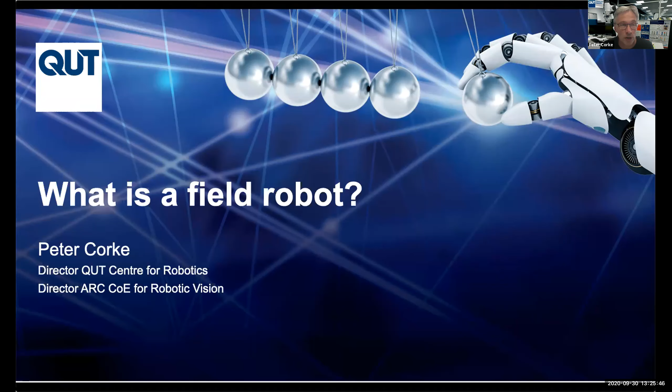So I'm going to talk very quickly about what robots are. Many people have got a notion of what robots are, but often that comes from Hollywood and fiction rather than from reality. The reality of robots today is that most of them are machines that work in factories.

The only impression to take away here is that factories are a very well-organized environment. Robots are very good at building cars and computers. They've been doing it for 60 years, and they allow us to build high quality products at low cost. So this is the natural home of robots. This is where they grew up.

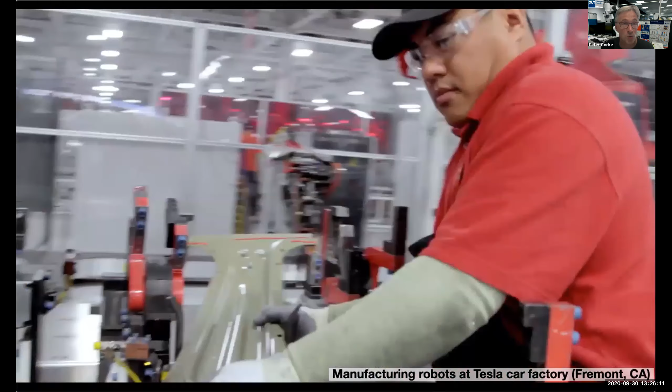Robots are used all around the world. This chart shows the number of robots per 10,000 employees in industry. We can see that a lot of countries, Singapore, South Korea, Germany, have got a very high penetration of robots in their workforces. That doesn't mean that they have high unemployment. So unemployment and robot population density are not correlated at all.

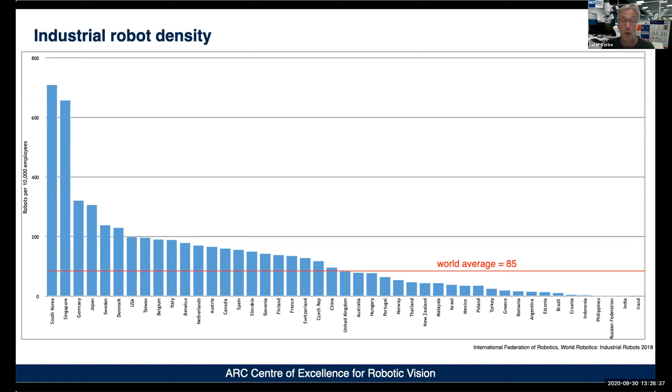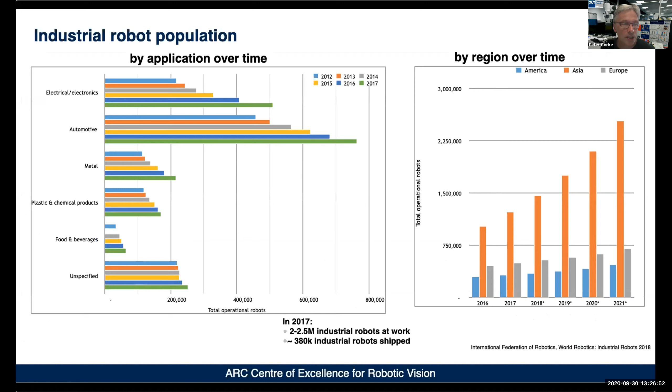Australia is about the middle of the pack in terms of its adoption of robot technology. And robot adoption is increasing, particularly in the Asia area. That's what the graph on the right-hand side shows. Predominantly these kind of robots are used in the automotive industry and electronics industry. That's where traditional robots are.

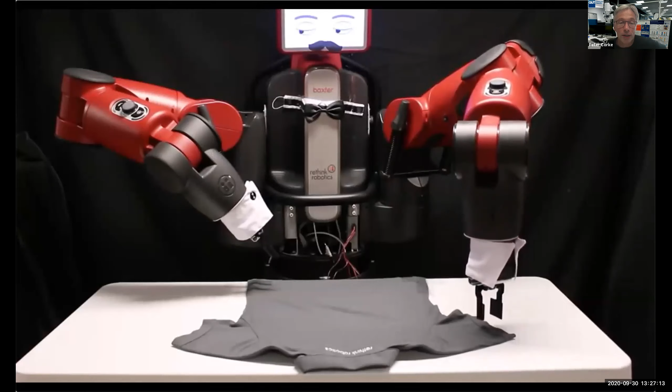So this is a very painful video showing a robot attempting to fold a shirt, and the video goes for 20-30 minutes. A very young human could fold a shirt way better and way faster than what a robot can do today. So robots can do some things very well, and they can do other things actually very poorly. And that's what robotics researchers are trying to do, trying to close that gap.

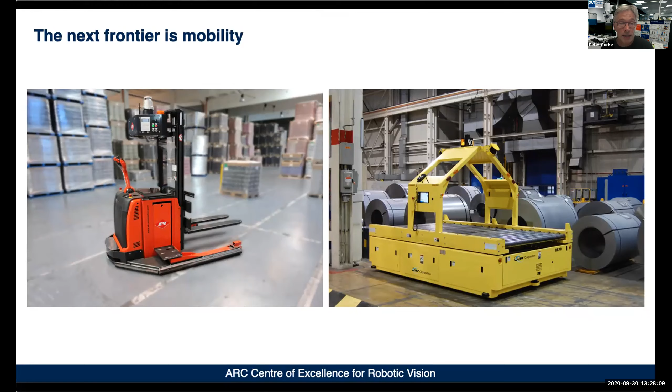So the robots that I've showed you before are fixed in place, and that's useful for some jobs, but the real value of robots comes when they can move around the environment, drive themselves around. So this started in factories with forklift trucks and so on that could move around a warehouse or move around a factory to move material from one place to another. Where a machine that's fixed to the ground can only access things within its arm's reach, these things have got a very large reach.

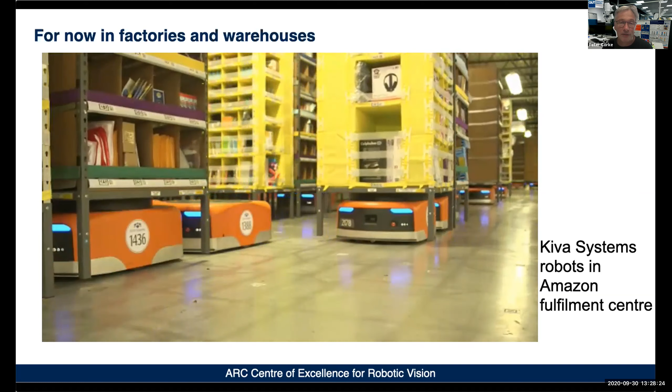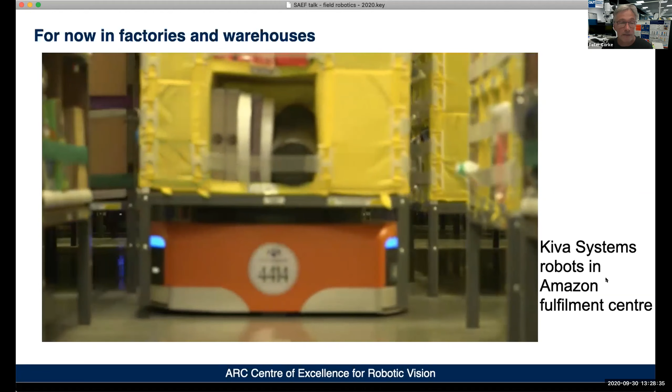Amazon as a company have really finessed this. They own over 200,000 robots, which are used to move material around their warehouses, which is what allows them to be the most cost competitive reseller on the planet. A huge adoption of robots. There are more robots than anybody else on Earth. And that's been a massive internal investment on their behalf.

So there's a whole class of robots, which is what I've spent most of my career being associated with, and which we call field robots. So these are robots that are not in factories. They're out and about in the real world, doing tasks that are traditionally done by humans driving machines.

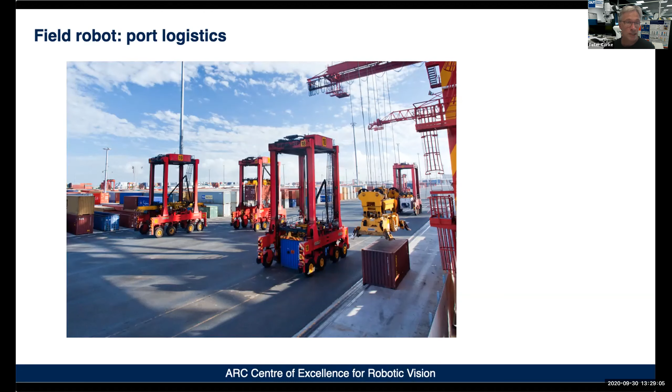So here's an example of robots at a port that can pick up containers and move them around. Those orange machines you can see there are not driven by humans anymore, they are completely autonomous. They can be used for construction, and they can be used for demolition. The advantage here is these are tasks where it's perhaps a bit dangerous for human beings to go, so robots can do these jobs instead of putting people in harm's way.

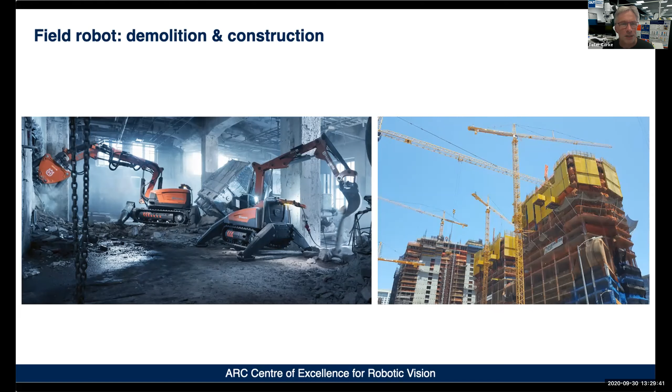Now, some of these robots might actually be remotely controlled. They may not be completely autonomous, self-actualizing. There may actually be someone sitting out of harm's way with joysticks moving the machine which is in harm's way. So that's a very valid type of robot. We call that a telerobot, or remote robot.

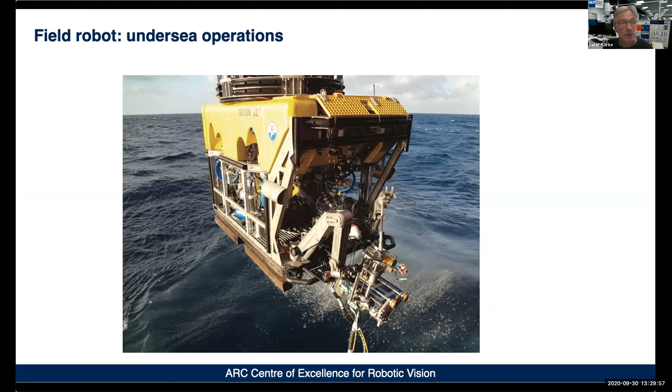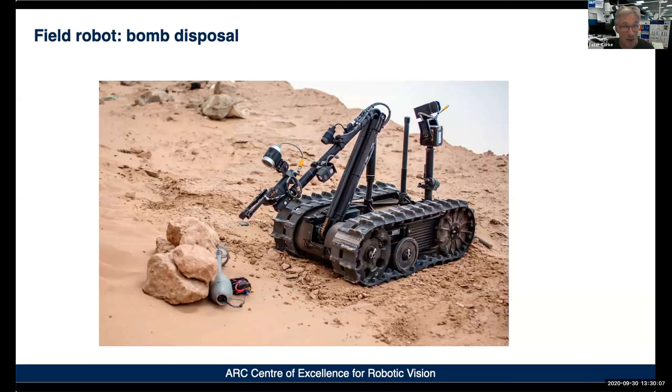Field robots for undersea operations, whether that's for marine science or whether it's for servicing the oil and gas industry, are another important class of robots that are working in the field. Forestry is another really big example. Bomb disposal, and various other, I'm afraid, military applications of robotics, fall into this category of field robots.

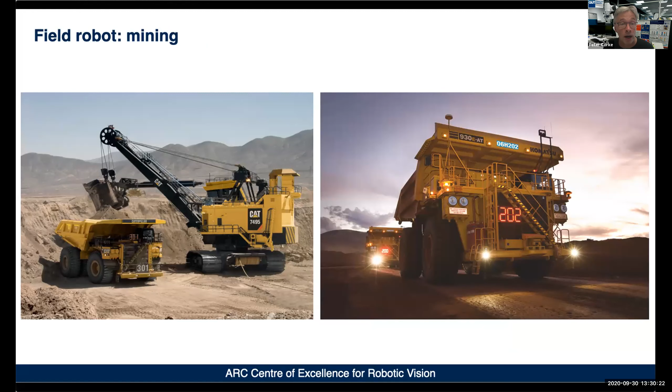And in Australia, of course, the big one is mining. There are a large number of completely robotic trucks moving around various mine sites in Australia, on the surface mines and in underground mines. This is all the remit of field robots.

Agriculture is an area that we've done a bit of work in at QUT. This is a field robot that we built that looks for weeds and removes them in broadacre agricultural crops.

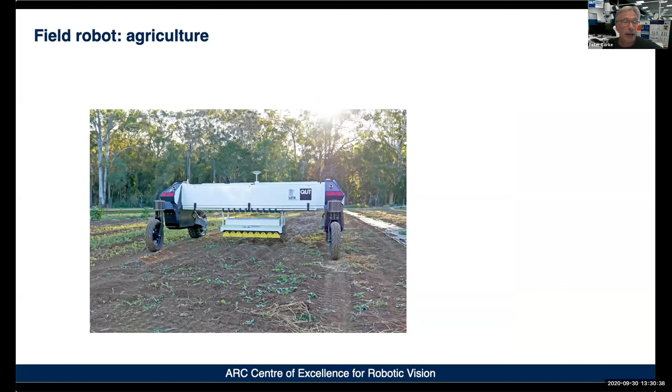Another example of a field robot is planetary exploration. We send robots to remote locations like Mars and the Moon because it's not cost effective to send humans there. But I think that same argument probably applies to the Antarctic, where we can send humans, but it is costly, it is dangerous, and perhaps humans augmented by outdoor robots could gather more data than humans alone can do.

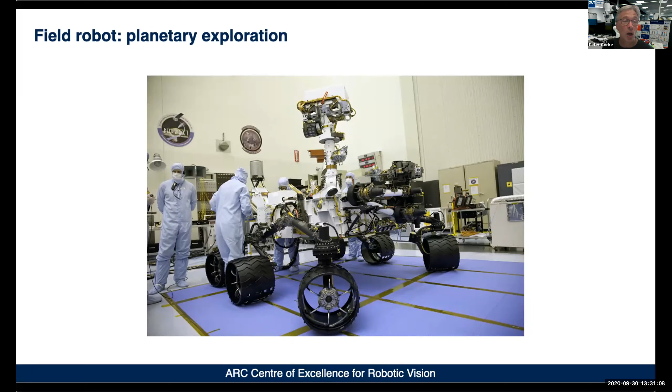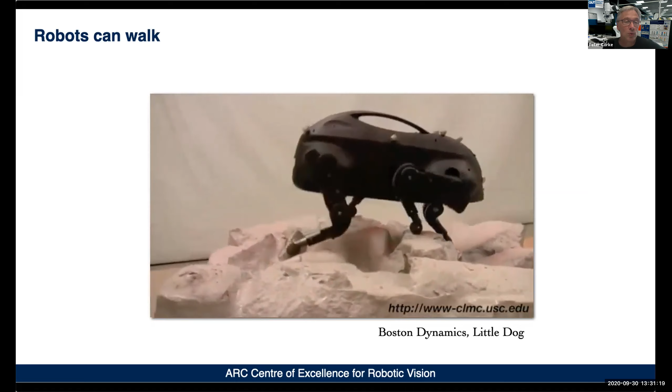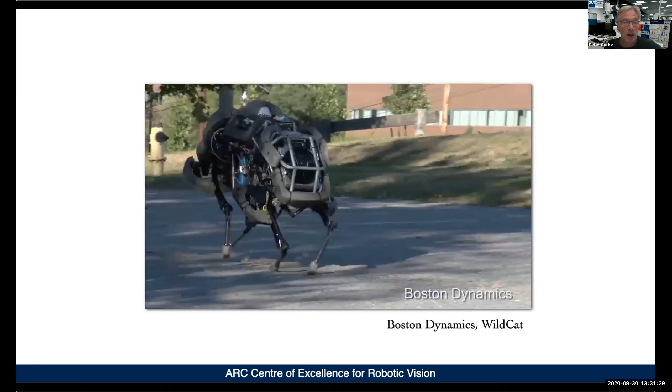Robots can move not just with wheels, there's all sorts of modes of locomotion for robots. This little robot is able to climb and walk using legs. Here's another robot which has got legs and is able to run much, much faster, made by a Boston company called Boston Dynamics. Here's an example of a robot developed at CSIRO in Brisbane.

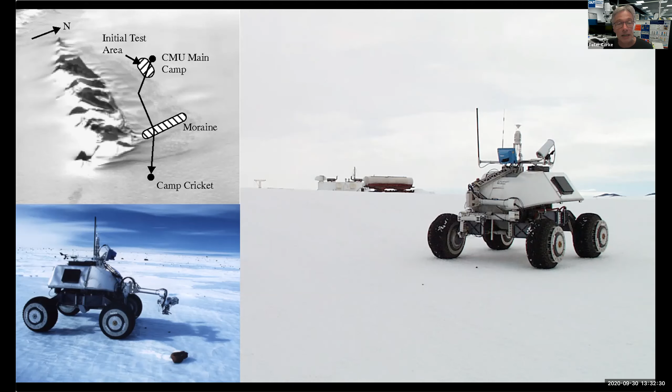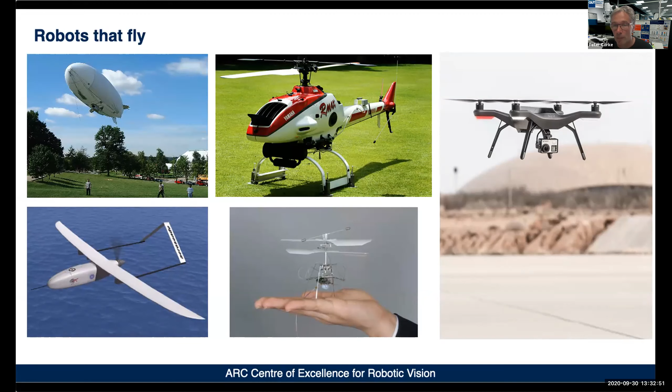These are just awesome examples to give you an idea of what robots are capable of doing today. Robots not only have legs and wheels, they can fly. People have built robots that look like blimps, look like helicopters, drones of all shapes and sizes. And then there's a whole class of robots which are either like robot boats or robotic submarines, which is what Matthew will talk about next.

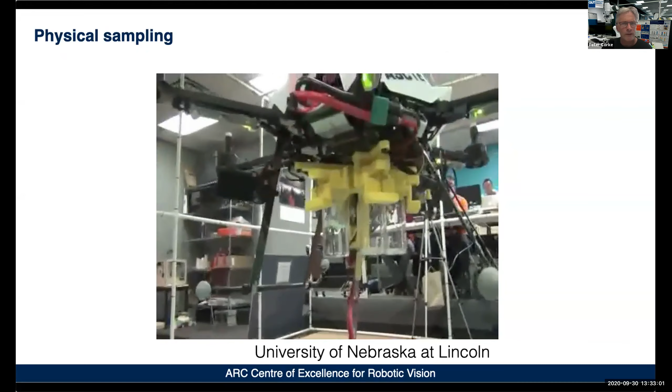Here's an example, which I hope you can see. This is a drone that's capable of doing physical sampling. This drone does water sampling. It flies out over a lake. It drops the end of the sampling hose into the water. It slurps up a water sample and then flies on.

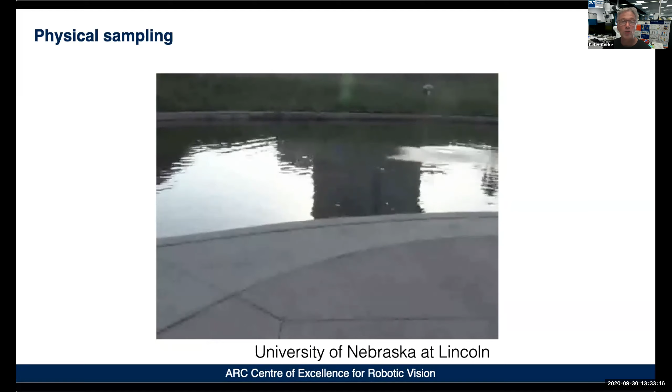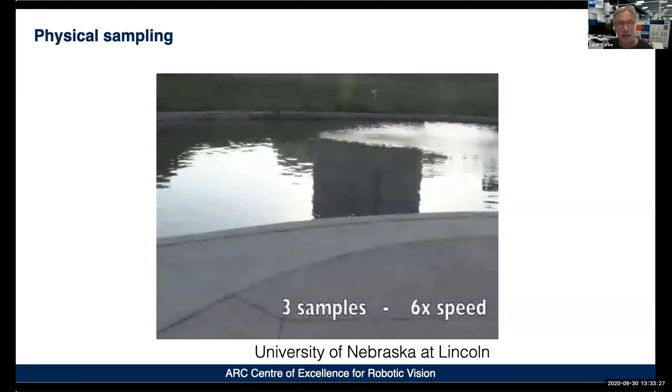So instead of having to send somebody out in a boat to collect a physical sample, the drone can collect a physical sample. And I think this is an interesting possibility of what we might be able to do within SAEF, is to use robots, not just to measure things, but to collect physical samples and bring them back.

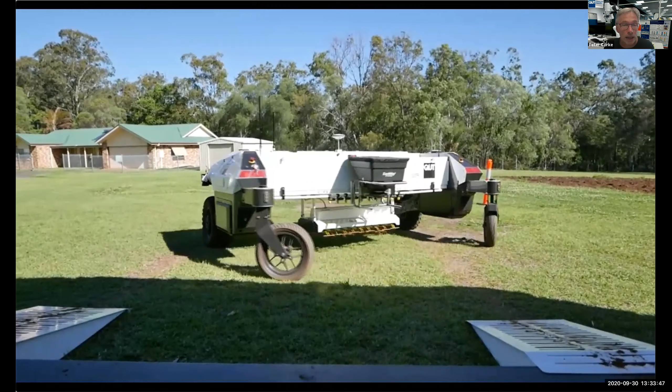Another robot, this one I showed before, we created at QUT for agricultural purposes. This robot is able to not only do its task, but it can automatically bring itself back to base. It can recharge itself, refill with electricity, refill with herbicide, and go out and do another mission. So it needs no human intervention to do very long endurance missions.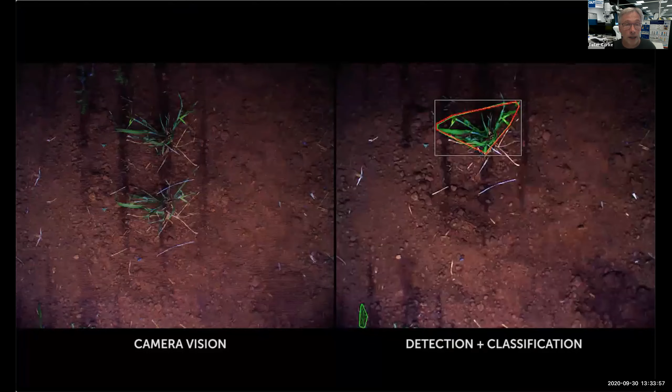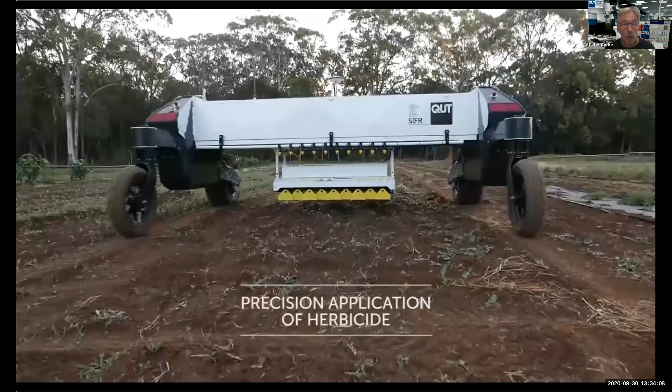This particular robot, as it's rolling over the ground, it's got cameras looking down, and we use AI techniques to recognize the individual plants that it's seeing, classify them and count them. For the weeding application, if it's a bad plant, then we will either spray it or chip it out of the ground.

The same robot, the data that comes from the cameras, we can build these into massive mosaics. So we can integrate the view from all the pictures of the robot rolling over the terrain into a huge image, a huge color image, a huge 3-dimensional image, which we can use to subsequently analyze.

And that's perhaps another possibility of what might be useful in the SAEF application.

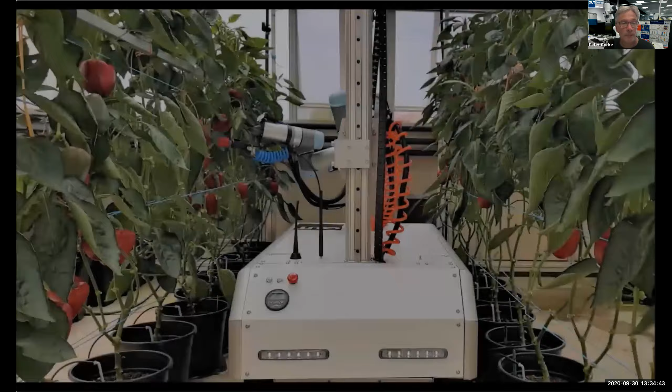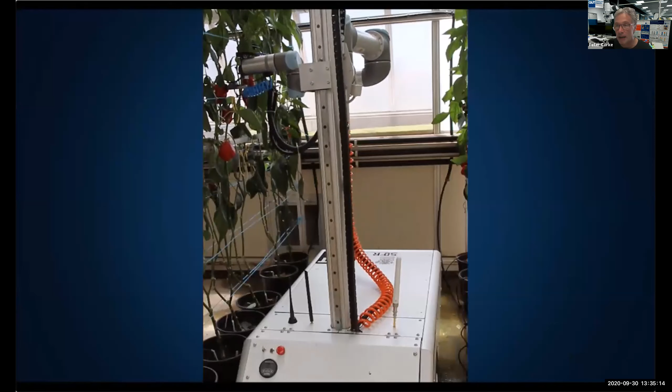The last robot example I'm going to show is a robot developed in our lab that picks capsicums. It's got a 3D camera on the end and moves around, building up a colored 3-dimensional representation of the scene on the left. Once it has that, it can recognize where the capsicum is, plan a motion to come in, grab it, separate it from the plant, and put it into a bucket. These are the sorts of capabilities robots have: they can move through the environment, recognize things, and perform physical actions.

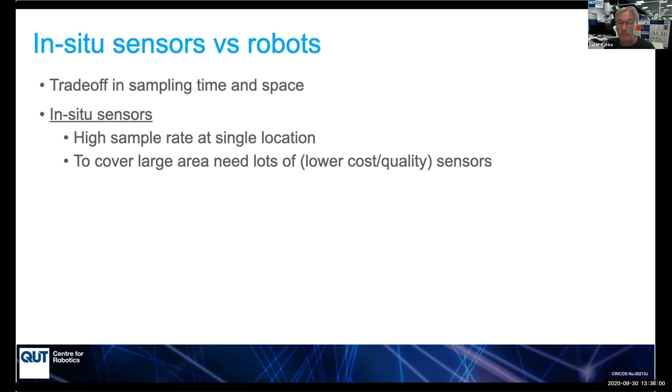Johan has given a good introduction to what we can do with sensors embedded in the environment. There's actually an interesting trade-off between the deployment of sensors and the deployment of robots, a trade-off in space and time. If we embed sensors in the environment, they can measure whatever quantity you choose, be it chemistry, temperature, physics or light, at a very high rate. But to cover a big area, we need to deploy a lot of sensors, which leads to issues with cost, so perhaps we have to skimp on sensor quality, and we also have challenges with communications.

Alternatively, we could put sensors on board a robot, and the robot can tour around the environment making measurements. That means you've only got one sensor, so you can afford to spend more money on it and use the robot to take it around to make the measurements you want. But you lose the ability to measure a quantity at many places simultaneously across space. The robot moves through space, and that's the trade-off between in-situ sensors and robots.

But a robot is also able to potentially collect and return physical samples, be that of moss or some organism growing underneath an ice shelf or something like that, as well as deploying a sensor and making a measurement at a particular location.

When the robot's touring around, it could be on a fixed tour, just visiting all the locations to make measurements and then coming home. Or it could be smarter—you could build in intelligence to it, a bit like a scientist. It will go out, and if it finds something interesting, maybe it spends more time there or explores a bit more before moving on. Or maybe it can relay its discovery back to base, and the humans can advise it what to do next. So there's a spectrum between in-situ sensors and robots, and completely autonomous robots versus human-assisted robots.

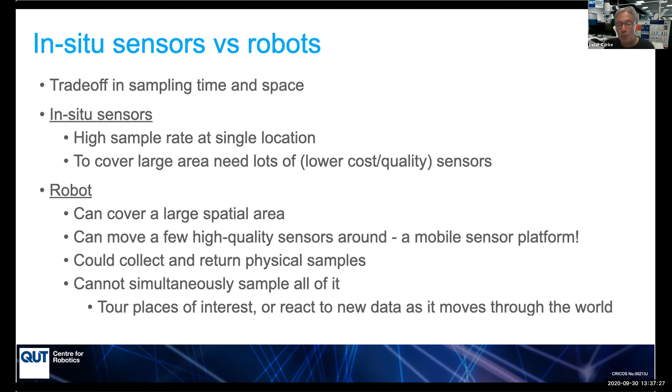It's quite an interesting and rich technology space. So homework for those of you interested in collecting data: think about what's the operating domain. Is it a robot that flies, walks or wheels across the land surface, floats on the water surface, or goes underwater? How long a mission does it need—hours or weeks? What kind of sensors would you like it to carry? Would you like it to do physical sampling, and if so, what kind? And then, how do we handle the data? Do you want it streamed back in real time, or recorded on the robot and brought back when it returns? And then there's the problem of how we analyze the huge amount of data that robots and sensors can potentially retrieve.

So, a quick introduction to robotics, hopefully put in the context of what we're trying to do in SAEF, and I'm really happy to have questions or discussions with you about what it is you're looking for.